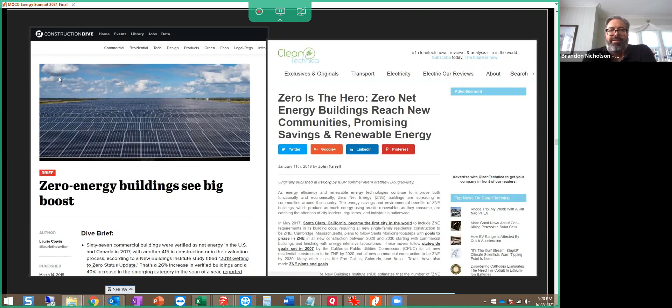As we brought the solar consultant on, we're actually struggling to have enough energy use on site to cover the solar. So there's some debate now about potentially moving some of that energy to other parts.

If you look at the target, 15 EUI is probably the easiest way to translate it to US terms. What's really being attacked is the heating, cooling, and dehumidification loads, and eventually hot water as well. Passivhaus was a little late addressing hot water, but over the last 5 years it's been a focus, since they'd already handled heating, cooling, ventilation, and dehumidification loads, getting them sometimes 80 to 90% below a typical building, and 40, 50, 60, 70% below even Energy Star.

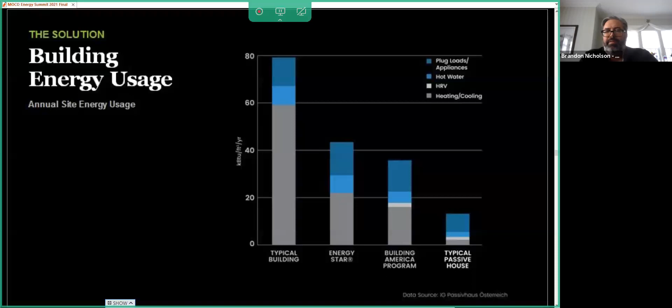Plug loads is always the biggest debate, since none of us can really control what people plug in. As much as we try to educate, that's the realm that I think all of us in green and sustainable building see as the last frontier, or the next frontier.

Probably don't need to cover it for this building, but we do at least go through the high level philosophy, the 30-second pitch of what Passivhaus is.

I still describe it as building a thermos. So you have continuous insulation, you minimize your structure coming through, you air seal it tight. Your goal is to keep as much energy on the inside of the building, or the outside, and not have it bridge.

That said, we all need fresh air. So the passive of Passivhaus comes from the ERV or HRV, the ventilation system. The idea of passive came because it was a passive exchange of energy—not passive solar. It was a way to recoup air or energy in air by pushing air through a mechanism, a series of intertwined metal straws or a ceramic filter, where you capture the energy leaving the building and put it back on the incoming flow.

The final issue is light. We have free light over the course of the year, but way too much in the summer and never enough in the winter. So how, through design, do you achieve that balance?

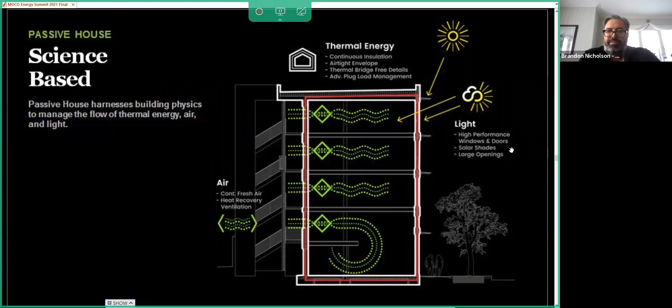We can flip through the next few since I've covered them already. One of the selling points I've put for Passivhaus in the past is that it is simple and verifiable.

LEED I'll give tons of credit for raising green building and best practices, but really, most of the things we do in LEED were practices we should have just adopted anyway. We work our way down the checklist and we're done. One other important thing is the bias towards urban buildings, but just because you build an urban building doesn't mean you should ease up on the balance of best practices.

My other early complaint about LEED was the fact that energy was always the hardest target to achieve, at least with the way that we traditionally build buildings. What I liked about Passivhaus from the get-go is that it is a modeled solution as opposed to a checklist.

You are actually paying attention to how what you design interacts with the environment around it, and then it's verified. You have third-party inspections to make sure you are building appropriately, and then you have an air tightness that is far beyond code. It's that 0.6 ACH, a blower door test run both ways to ensure the envelope is airtight, far beyond what most buildings do or achieve.

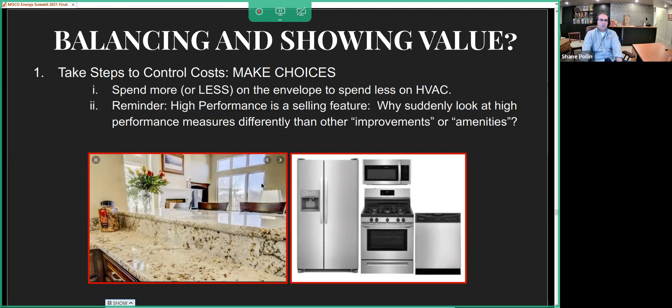And yet it still seems like a lot of folks are reluctant to make that jump. We think we have to start educating, and I think it's already starting to happen with the consumer population—our occupants, our residents—to not only focus on things like granite countertops and stainless steel appliances, but to make choices in how we're building. We can choose to do things like granite and stainless, or we can start placing a value on high performance features, on comfort, or on health.

That is one of the things I think we did successfully at the Duffie companies, and what I hope to continue doing with PS is to bring what we're doing down to the real life of the occupants of the building, and say that air sealing, yes, is good for energy, but it's also good for addressing transmission of noise, which is a top complaint among multifamily dwellers, or odors, another complaint, particularly with the advent of things like legalization of marijuana.

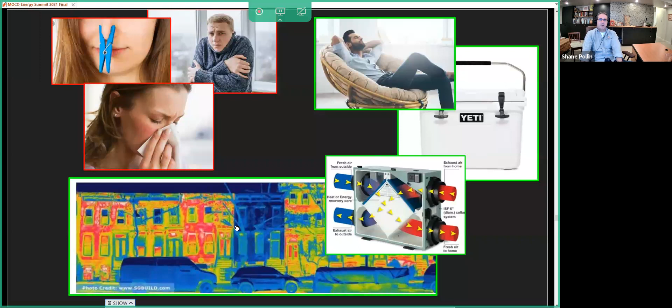I've had friends who have complained that, living in certain places, they just cannot keep the odors out. So some of the things we're doing for high performance, as Brandon mentioned, air sealing is paramount—it really has benefits that cross lots of different areas, including some that are really impactful to folks living in these homes.

And with that, we'll go over the meat and potatoes of how we're trying to achieve what we're trying to achieve. Brandon, you want to run through our overall design approach?

Yeah, so back to what Shane said very early on, iteration and simplification were key to this project from the very beginning. We'll get into each of these in depth, but these represent the divergence from a standard approach—meaning for the basic structure, we went with a panelized steel system that we'll get into.

For HVAC, we have an approach where we look at either individual, neighborhood, or whole building approaches. Where we landed on this project was individual control, a super simple ventilation or conditioning strategy. With ventilation we can pick and choose, and we realized for this project in particular that a neighborhood approach made sense—so while conditioning might be controlled independently into a unit, ventilation and dehumidification could be handled by clustering groups of units onto one unit to get maximum efficiency.

For water heaters, we had a lot of debate about system-wide versus one-to-one, and landed on individual and shared heat pumps. Appliances are really kind of the plug load—what you're putting into the unit—and that's more of a spec decision. By using heat pump dryers, we were able to eliminate ducts and get savings. These are condensing dryers; they're heat pump dryers where the only byproduct is water going down into a condensate drain.

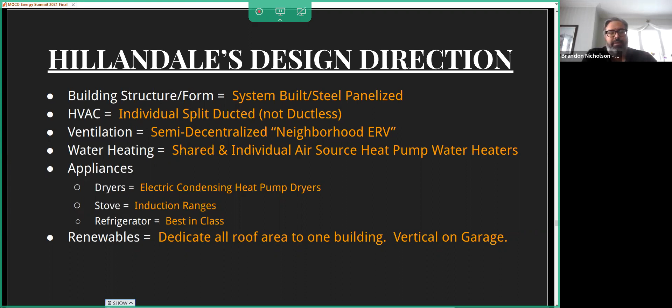But as the project continued, one of the interesting things that happened was we were trying to figure out how to screen the garage to deal with planning review. And it turned out one of the cheapest things we could do was actually clad the garage in solar, cheaper than just about anything else we could do. So we ended up doing the very unintuitive thing of cladding the north face of the garage with solar panels. It faces off to the northwest.

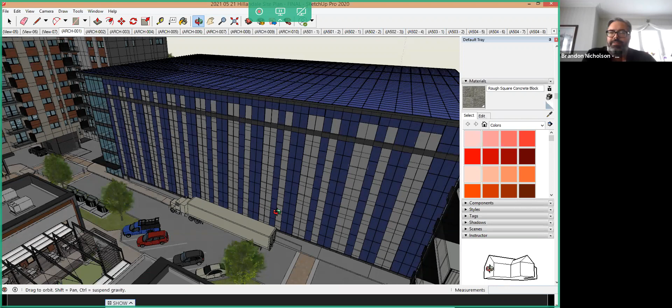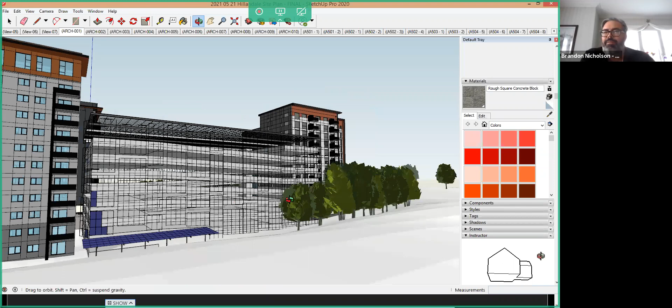At first, we thought about using used solar panels to achieve it. Then we threw it in the NREL calculator, and it turned out we could get 30 to 35% energy production out of it. So once again, with iteration over time, we landed on actually a very functional, practical scheme that when you look at it as an outsider may never make sense. Who puts solar panels on the north side of a vertical garage?

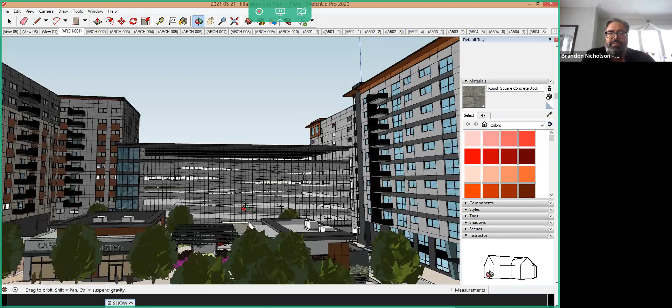But the fact that it could continue to iterate, offer an inexpensive solution, and also tell the story. Anybody who's in the plaza, the retailer, or part of the project, this is going to be the backdrop of that public space, with these kind of solar panel columns that go up and down. And then even the canopy carries beyond.

But as I mentioned, when we started to really engage solar and get down to full calcs, we are even overshooting our initial goals.

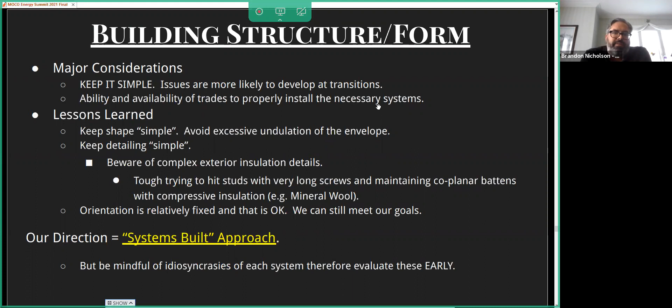Going back in where we landed on structure, keep it simple. I think Shane's approach of moving to something manufactured led us to consider a whole bunch of different things. But where we ended up was precast, or I guess a pre-manufactured structural system called Prescient. This was not in the project to begin with, but it's a 16-story panelized system out of Colorado originally, but now has a North Carolina facility.

But this comes back to durability, speed. This is something which is machined. It is precise to within about 1/16 of an inch. It does have vulnerabilities, but very early on, we paired it with traditional conventional EIFS.

And by that, I do not mean the 1 inch of blue board tacked on the outside of a wood frame building like we do in the US. This is all the insulation being on the outside, done in a similar manner to how they would have done it in Europe. And back to trading value, as Shane talked about earlier, it turns out this was the least expensive way to get the building clad and insulated, coming in far below any other cladding we could have put on price, and taking care of the insulation all at one time.

And I'll point out, Brandon, sorry to interrupt, but you mentioned there are some idiosyncrasies to the building. I'm not sure there are vulnerabilities in it, but the idiosyncrasies of the system, and again, a reason to research them early.

So Prescient works on a 2-foot grid, and Prescient likes rectilinear. They don't like curved walls. They don't like strangely angled walls. There's certain span limitations.

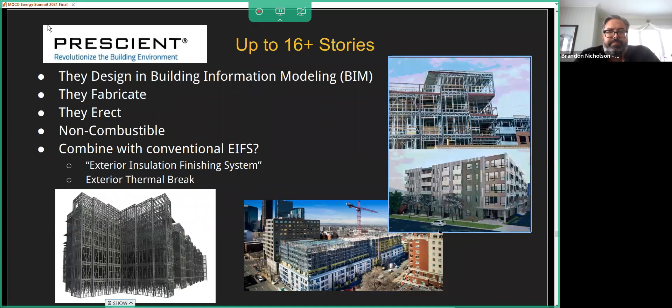So the next element was water heating. The major consideration is that we're trying to build an all-electric building, not bringing in combustibles. That meant electric, and that meant heat pumps both for units and for hot water.

We had to evaluate whether to use a centralized, semi-decentralized, or individual system. We had to consider accessibility for maintenance, and recognize that heat pump hot water heaters are effectively air conditioners, providing supplemental cooling and dehumidification, and how we could take advantage of that or address it.

We had to keep in mind floor area requirements and who would be paying for utilities. We're actually going with a split utility approach. The age-restricted building, which is two-thirds affordable housing with 155 units, has about half of those units sharing water heaters, one heater per two units, and that building has all utilities included. That's partly due to the master meter approach needed to reach zero net energy on a single meter using all of that solar.

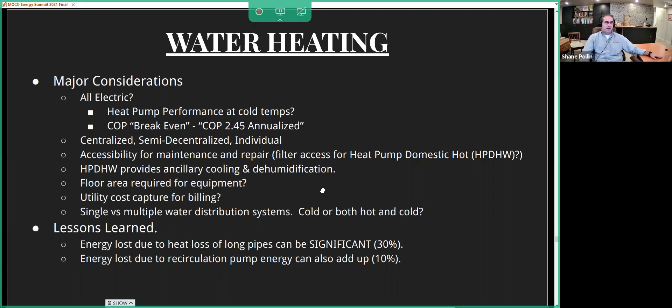So all of these systems required understanding their idiosyncrasies and trying to keep things simple. A single master meter with all utilities and the solar energy going to it was simplest. We don't have virtual net metering in Maryland at this point, so we decided to go with a hot air source heat pump water heater in a semi-decentralized implementation.

Carrying that further, we have cooling and dehumidification needs because we're in DC and Maryland—buildings here tend to have far more cooling need than heating need. So we were able to take the byproduct of the hot water and have that work towards meeting one of our other demands.

We realized we needed to get a bit more energy into the building to offset the air conditioning we're now providing through the heat pump hot water system. So at the end of the corridors, we started tuning up the glass to get more heat in and help offset some of the air conditioning. With good MEP and early modeling, you can really get these systems to play off each other and take what would otherwise be waste to meet the overall performance goals of the project.

Knowing that first generation passive house buildings had a reputation for being a little warmer than comfortable, we have this byproduct of cooling and dehumidification in a building that can tend to overheat. We're not supplying extra heat by running hot water or refrigerant lines that might reject heat but still transmit energy through the building. We're not trying to dump extra heat throughout the building using a more central system. That's one of the benefits of not going to a central system.

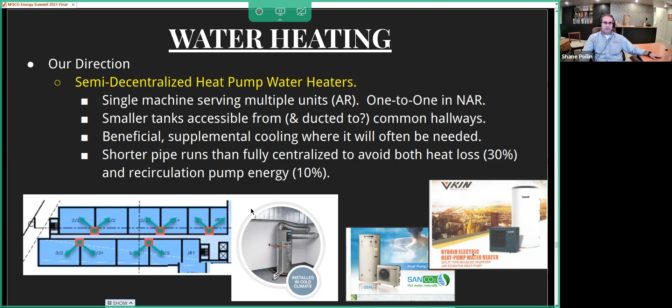I show some of these others, like SanCO2, because I think these separate condenser units, separate from the tanks, are an intriguing direction the market is going. But in our application, our basis of design is a traditional air source heat pump hot water heater, an 80-gallon tank serving when we have 2 units, and smaller tanks when we're on an individual unit.

For HVAC, again, considerations trying to be all electric: we had to decide central versus individual, accessibility for maintenance, how do we get to filters, and utility cost capture for billing. I know some VRF systems have the ability to measure refrigerant and pass that through, but that's not so simple, or is it well implemented often?

So we learned again that passive house structures can tend to overheat. Cooling's important - most systems are oversized for minimal loads, so beware of short cycling. This is still one we're working with Mitsubishi on, to try to keep the system sizes down. That's one reason we hope there's a benefit to a ducted system versus a ductless system, where we have one unit that powers the entire unit rather than putting multiple heads and getting even worse - we don't want to rely on a single point of HVAC for delivery.

A lesson learned - and I heard it loud and clear when I toured a passive house building in Boston and spoke to the owner - mixing, just expecting mixing of cold air when you're supplying cold air, doesn't seem to be that effective. Central systems often come with significant complexity - they're more costly to install.

We had Bozzuto Construction providing pre-construction services, and at one point the question came up: what's the cost of that VRF system relative to a simple ducted one-to-one? It was materially less - something like $15,000, something crazy. They were seeing VRF systems, by the time they implemented them in high-rise buildings, become exorbitantly expensive and difficult to get dialed in.

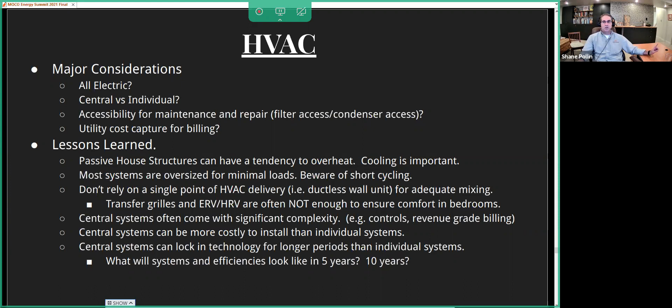Also, with a central system, when you put that big unit up on the roof and carry refrigerant lines down, you're not changing that big central system anytime soon. So as individual air handlers in the units fail, you're tied to the system on the roof and you'll be keeping that same system, as opposed to our approach with an individual ducted heat pump. As these ducted heat pump systems come down in price and up in efficiency, if one fails, we just replace that one system.

We did not place a value on being able to control the individual systems, although I think we will ultimately be able to. We want to monitor heat and humidity from these systems, but not necessarily the complexity of a whole building control system. So we went with this very simplistic, up-in-the-ceiling, ducted system.

The next challenge is where do you put the compressor, because there's also line set lengths. The most cost-effective solution we found was to actually provide a deck on the outside of the building where we could mount the condenser right in front of the unit. But we took it a step further, because these are such low sound units, and this is a fairly noisy site, that we ended up stacking two small condensers on top of each other in a fin that runs up the side of the deck.

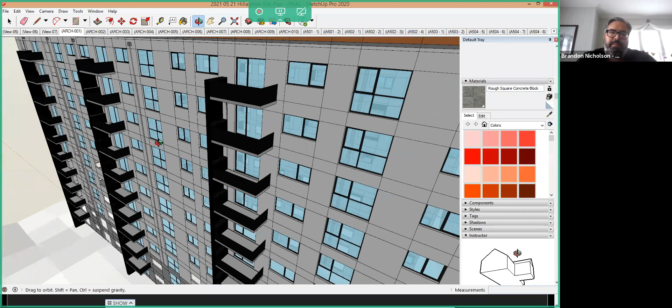The deck itself, we eventually found a pre-manufactured unit out of Washington, where they're building us the receiving cage to be able to stack those two very small condensers on top of each other. Again, that's a great example of why you typically don't see it.

Now, I joke with the team. In Asia, you see a lot of the home shows, you see anywhere for house hunters worldwide, you see either ducted or mostly ductless units up on the walls. But in Asia, I have these great pictures of just walls of condensers on the exterior. The architects assure me I cannot get away with doing that here. Guarantee you will not make it through park and planning with us.

I said we could paint them a color, we could turn it into a feature, we could do something. But the answer was ultimately a balance of hiding them in plain sight, if you will. Of course, they have limited duct lengths, and that's why you don't see a lot of these smaller systems.

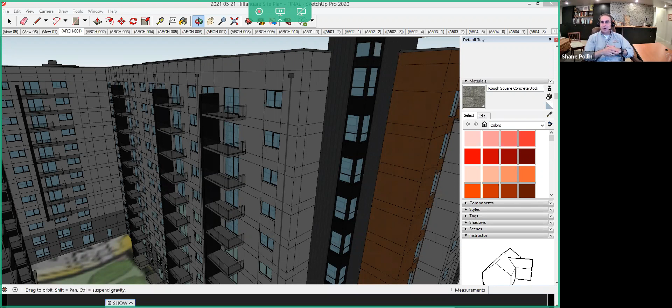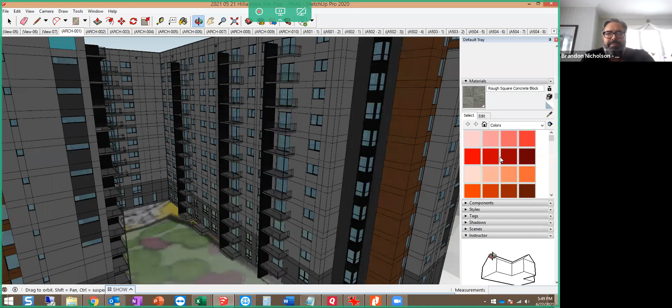It's more condensers, not more air handlers. We have the same number of air handlers we would have had with the VRF system. It's more condensers, but they're very easily accessible right on a balcony, and they're very affordable, and almost anybody can work on them. That's the key here, trying to implement this mechanical solution through an architectural solution. Anytime you need to get at them, you can walk out on the deck, remove a panel, and you have two condensers right in front of you that you can access without scaffolding, without lifts, without a crane. It is incredibly easy to maintain.

Now, that takes care of conditioning. Now, ventilation - same thing. We've done a whole variety of individual unit solutions, neighborhood solutions, where you deal with a cluster of units or a whole building. The whole building approach has a lot of drawbacks when you get to high rises - there's pressure differential issues, fire dampers, and a whole bunch of other stack effect issues come into play. Horizontal, we've actually found, works quite well. If you can gather a floor of units and run ducts down the hall, it's a good, efficient way to do it.

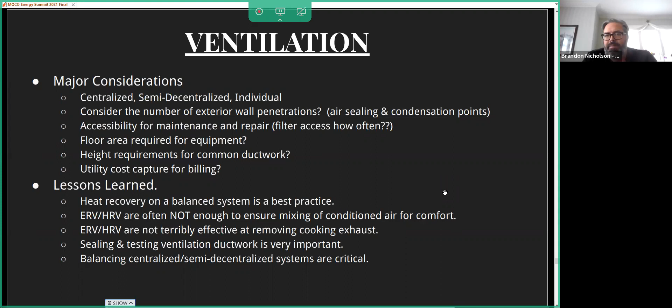Another requirement for the project was kitchen exhaust hoods. So how do you actually deal with makeup air if you have kitchen exhaust ventilation? What we worked through with Swegon is the ability to put a unit down the hall that will serve anywhere between 14 to 20 units. It runs back to a central unit that then reaches to the exterior wall in order to get supply. These pictures are old - we're using a larger system ultimately than these.

We ended up working through with the electrical side, running at higher voltage, which was only for the larger units. So we ended up combining two of our neighborhoods stacked vertically. Back to just the iteration - we have a huge resilience goal for this project, because we have the electrical engineer, resilience, solar, mechanical, and Passivhaus all integrating.

Two years ago, we came up with the one unit per one floor approach, which works great. We came up with a mechanical room that works great. We had line sets worked out, and we were setting off to the races. Then resiliency comes in, and all of a sudden it makes more sense to run the things at 440 or 480 volts. That makes sense to upsize. And then we didn't really want to add dampers.

The team made a last-minute move to do one unit every other floor, creating small vertical neighborhoods. We're not creating a bunch of vertical ducts, complexity, or fire damping, but we're taking almost twice as many units as we had in our first pass.

With the way the team works, we were able to quickly run that through contractor pricing, supplier, mechanical, and electrical cost-benefit analysis. In the end, the way these systems work, we run them down the hall, then have branches that come off to supply and exhaust.

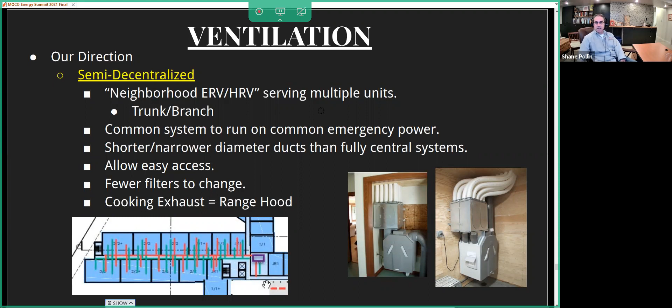To take that a step further, the conditioning and dehumidification module tied to that unit will also be powered as part of that. So if there's a hurricane or a blizzard, you might not have individual control—meaning you might not get the temperature exactly where you want it—but overall you're going to be within the typical comfort constraints of a passive house build, because there's going to be that dehumidification, cooling, or heating depending on the season running through.

Again, resiliency and sustainability—we're putting renewables on, quite a bit of renewable energy on the building. I pulled up the image to show we've got a parking garage that faces south, adjacent to the very heavily trafficked Capital Beltway, the ring highway around Washington, with 200,000+ vehicles pre-COVID, and rapidly returning to that level of traffic if not already there.

What we're doing, in this older image, is basically dedicating all the energy from the site and the garage to the single building. So people hear we're trying to build a 12-story zero net energy building—yes, we know we could typically produce as much energy on one roof for far fewer than 12 levels, but we're not using just our roof. We're using the energy available on the garage's roof, on the vertical face of the garage, and even on the south face of the garage.

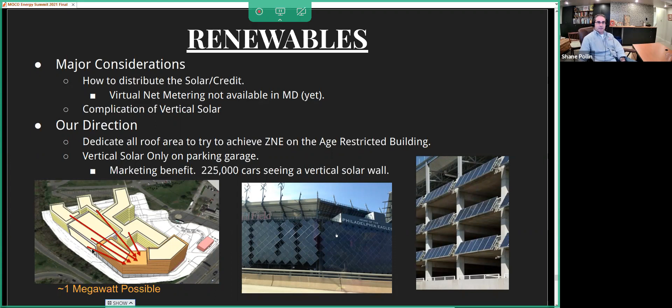Again, we're happy to have the project in Montgomery County in partnership with HOC. Montgomery County has a new Thrive 2050 plan, for those of you familiar working in this area, and we think the project really just fits right in. There's not going to be one silver bullet for what types of buildings need to be in the future—it's going to be several—but clearly projects like Hillandale Gateway are one of the building types that are needed.

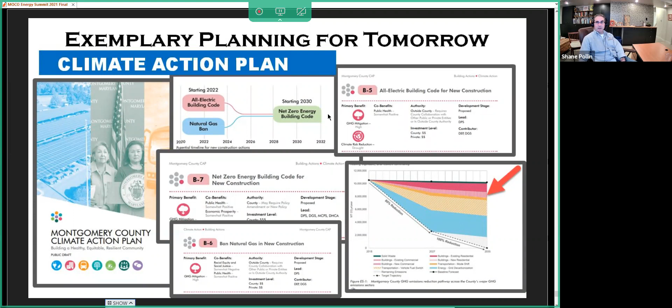Montgomery County also has a climate action plan. Here you see, starting in 2030, zero energy building code—they want to aspire to be zero net energy by 2030. Here you can see we're a decade ahead. We're trying to build zero net energy and demonstrate how it can be done, at as close to parity as we can, from the beginning here in 2021, starting construction in '22, not in the 2030s. We're really proud to be working on the project together with HOC. I'm thrilled to be able to work with Brandon, and I've learned so much from him in this process. And that is Hillandale Gateway.

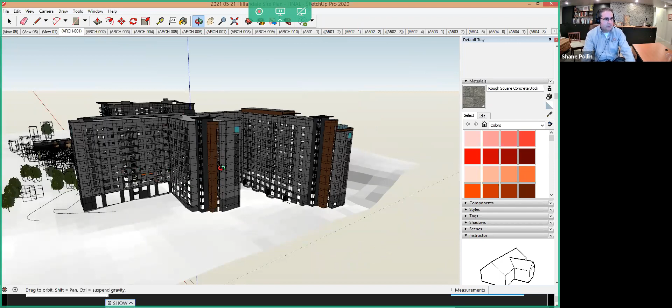I can pull open the model. If anyone has any questions, we can do it in the context of this model. But again, it's a two-building program. There's the age-restricted building, 155 units. There's the non-age restricted building, 308 units, with a couple retail pads in the front, connected by a garage. The buildings are actually offset one level—the NAR is half a level below the AR building.

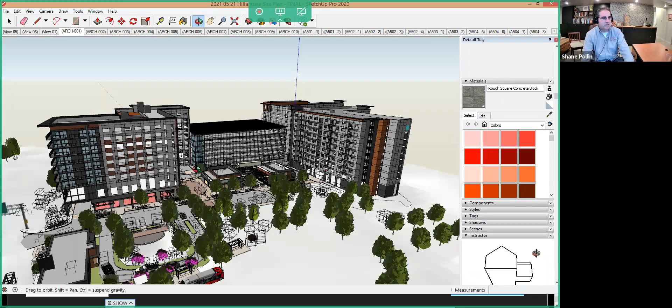This is the north face. The south face faces the Capital Beltway. Here you see we even have a solar canopy on top of a play area on the ground, because the volumes of traffic were relatively high, so we just put a shield up. The site is very tight, and we wanted to really utilize any space that we had.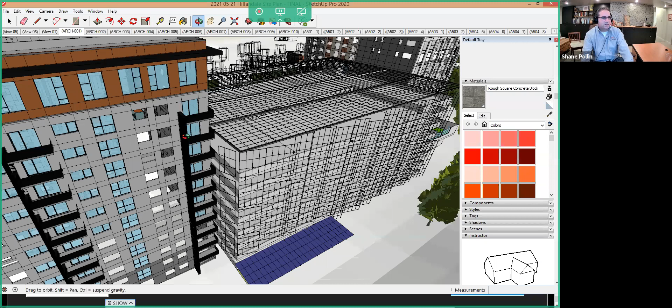Here you can see those fins that are hiding the condensers. There are 2 condensers here serving the end unit and the unit adjacent. If we zoom in, you can kind of see those Passivhaus-style tilt-turn windows with 1 operable pane, and the rooftop amenity space.

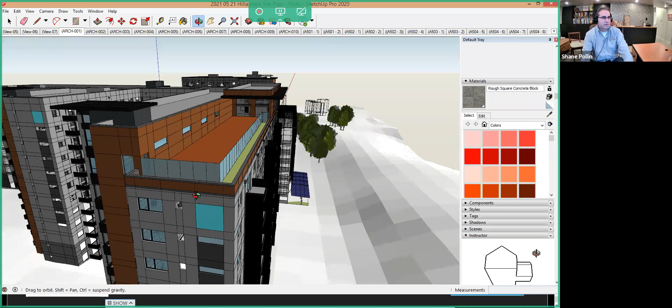Sound attenuation and noise attenuation were a requirement through the planning process. So we came up with this strategy of the parapet wall with the glass behind it, partly again for maintenance—we try to think things through. If we put the glass out on the edge, how are we going to maintain it? So we put a doorway through, we can come in, clean the glass, and try to basically keep our building in good condition for many years.

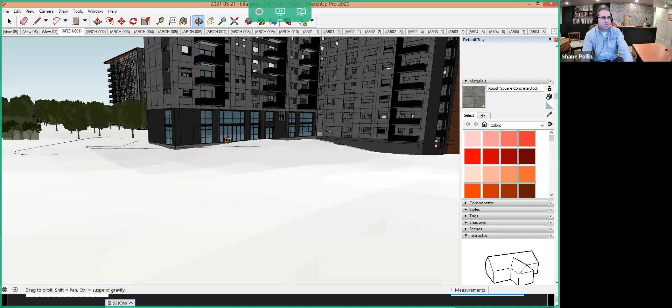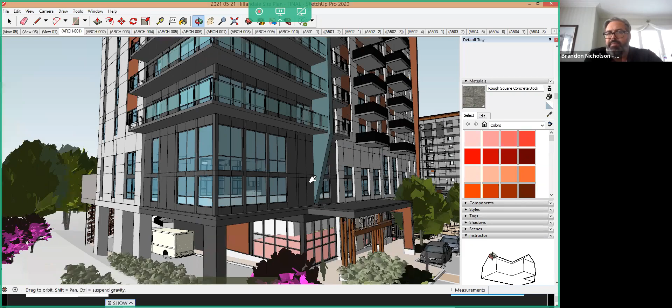We really tried to think through function of the site and loading and unloading, so there's integral loading.

While you're talking through this, if folks want to type in questions, that's great. There's 19 of us—you could unmute and we could have a conversation too. Yeah, but we have a question out there.

The pool just brought up a whole lot of questions for me, but I'll come back to that if we have time. Did designing to prescient modules and rules make it harder for other subs to compete on price during bidding? How much extra time did it take to go through the process of learning the prescient system well enough to design with it in mind?

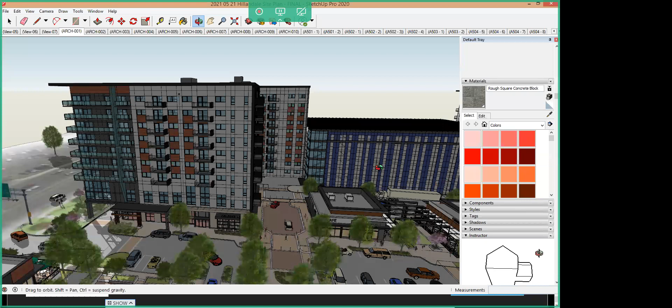Yeah, so the prescient system was designed before it really even got to that subcontractor pricing. It's basic—it's a light gauge steel frame, so there's a metal post. It's the same in terms of running wire, running plumbing. It's the same as any commercial cold-rolled metal stud system.

So we don't think there's going to be any pushback necessarily on that type of system once we get it out there. We didn't hear any negativity through Bozzuto while they put it out for preliminary pricing to different folks.

In fact, I think what it does is we can avoid conflicts, so we could pull up, like, they model every stud, right? We can see where everything is and help provide clear guidance, and we worked out some of those things earlier. It definitely takes more time to program to the rules, and I think it takes as much time as you're willing to give it to design to the best of your ability.

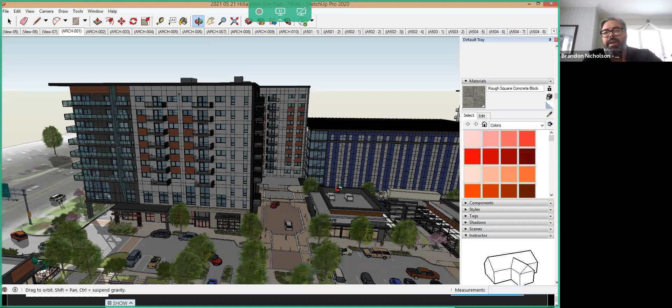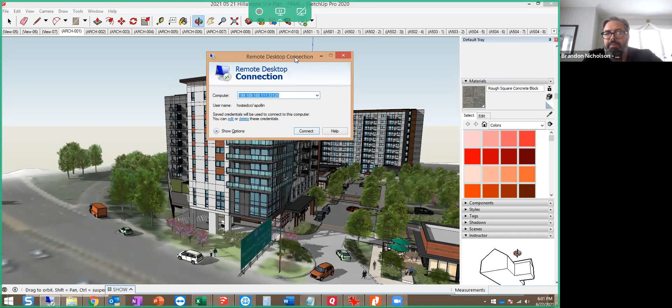I don't know how, as a percent or hours, Brandon, maybe you could say how much. Well, I think what really made this project work from a design side was the fact that we knew fairly early on in the entitlement process that we were heading towards prescient to get height. Once we knew that, you've seen a couple earlier versions of the projects that used to have more angles, were a little bit more low rise, a little bit more spread out. There was an epiphany in the middle of entitlement that what we wanted to do was to actually go vertical.

And actually, one thing Shane didn't cover was that retail pad is actually preserved as a potential hotel or office building in the future. There's an ability that you could remove those two retails and put another 7 or 8 story building in the middle of the site if it ever became economically viable.

The other thing is we realized prescient prices closer to wood than it does to type 1 concrete. So we went to maximizing prescient everywhere we could, trying to get it up to 12 stories, bearing slab on grade wherever possible, and then only doing raised podium decks over amenity or retail space. So once we understood those rules, we actually reconfigured the site in entitlement to be able to do it.

But we always knew we could come back and do a type 1 building. We always knew that we could come back and alter to another light gauge manufacturer. Their price has gone up, but it is. So is wood. Yeah, so is wood. It's continuing to make sense.

Yeah, and so that's a key point, though, is that we chose a proprietary system, and we said early on, we can build a building designed to the prescient rules in anything. We could build that plate in wood, we could build it in concrete, we could build it in metal, we could build it anything. But you cannot build a building designed for anything in prescient. And so we didn't remain beholden to prescient, if you will, as a proprietary system when we made the decision to design to those rules. We just knew that we were building to optimize to that.

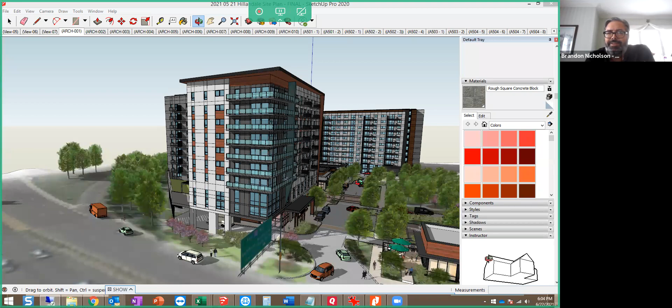You know, I'm looking at that, the NAR you can see in the distance here. You can see the two decks facing front, and there's a panel that's just slightly wider in between those two decks. You barely even notice it, but you can see the corner panel, that mid panel between the two decks, and then that panel in between the next two decks. It's very, very subtle. You wouldn't know that it was there, but knowing that they had the rule that they needed essentially an L in the exterior facade about every third unit, great.

We have an L in the facade every third unit, and that affects our retail glazing and the glazing above. I don't even know if Shane knows we went through that coordination, because it was one of those rules we learned early on—we can follow that as long as we know it's there. Because of that, we've had very little modification as we've continued to develop.

I will say the danger with Prescient is they're so fast, and on top of it, they have a crew of engineers and CAD designers in Poland. So we are always behind them. Any change we do takes 24 to 48 hours to get integrated into Revit—they're on it overnight and have it back to you by the next day. So I'd say they actually have a very strong engineering team.

They have a very good production team. The only caveat I'd put is they do have some communication issues between bidding and design, but that's minor—something you can get past. I've actually found them very pleasurable to work with.

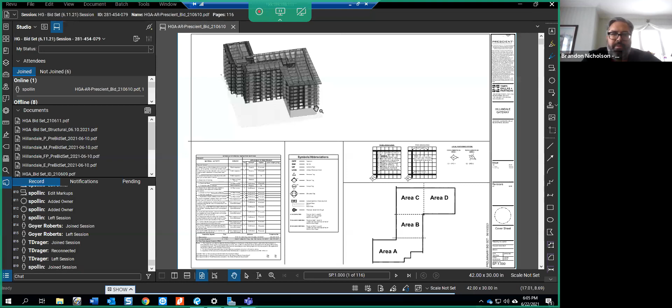Now, Shane brought it up—I'd bring up the Revit model, except what I originally realized is part of the reason it takes so long to process is you really do have to peel back what you show, because they model everything down to the bolt, say, in an expansion joint, in the full model. Every stud, every I-beam, everything is there. They also do run clash detection.

So one of the things is we were just doing a bunch of land use coordination. We had a call today—Torti Gallas, who's actually been a great partner we work with in the DC area, had some intern move 24 windows, which now affects their windows. They can tell us, you need to go look at these stacks, we think we have a conflict. They're very, very thorough at what they do.

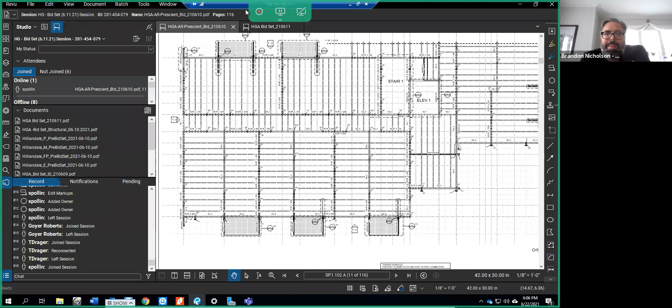It's a great question in the chat from George about how the balconies are structured. You said balconies, and I was thinking passive house penetrations. Yes, there is a passive house penetration.

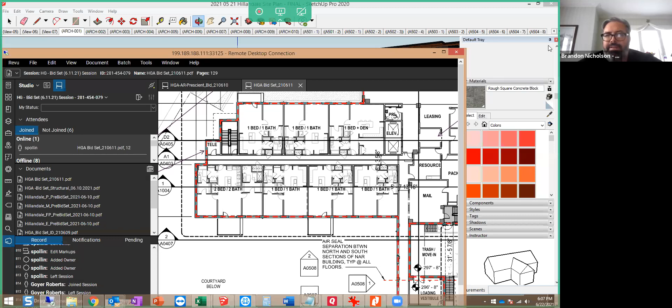So there is a bit of kind of armatherm or high density generic plastic in between. We worked it through with them early—their details have changed, and then we morphed with their change. But we have two outriggers that are going to be provided by Prescient that hold up their standard deck, which sticks about 6 feet off the face of the building. Onto that is going to be put an aluminum pre-manufactured deck with a rail system. And then onto that is actually where the condensers go, and then that goes back into the wall.

So the picture is Prescient's going to go up first. The outriggers and the extensions are going to go on that first pass. Sto, or EIFS, is going to come in and apply the EIFS skin to the whole building. There'll be sleeves to receive the line, and there'll be two outriggers ready to receive the deck. The deck will go right down on the outriggers, really conceal the outriggers. And then the rail goes up.

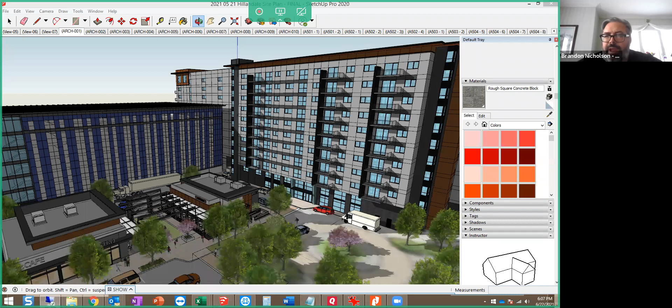So it is a very repetitive system. My joke is the only deck that doesn't comply with that is we use the prescient standard deck on the corner of the AR building where we wanted a continuous deck. So there we do have a series of outriggers and a series of thermal breaks.

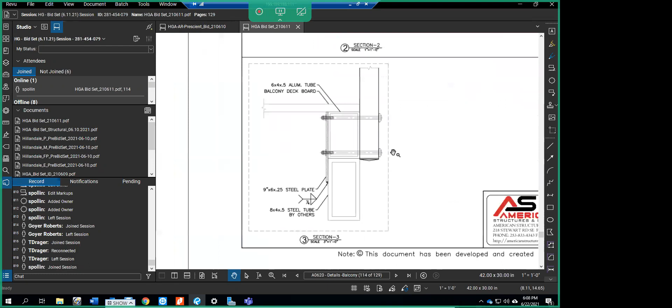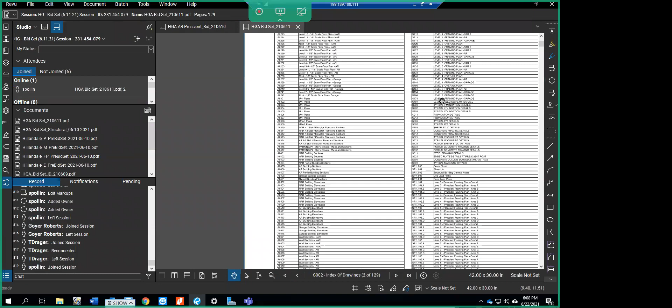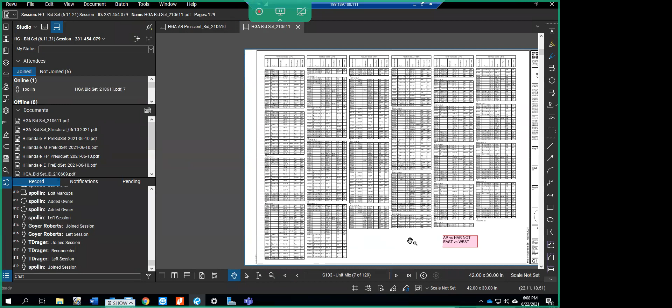Alright, so I'm going to ask a question about the pool, and then if nobody else has questions, we're going to call it a day. So pool in a passive house—for energy code, you'd be doing energy recovery on the water heating side of the pool, so air leaving the pool would have to heat the water of the pool. How do you actually balance that if you've got that strong of an envelope? So step back—the biggest problem with pools is two things: evaporation and contact with the ground, right?

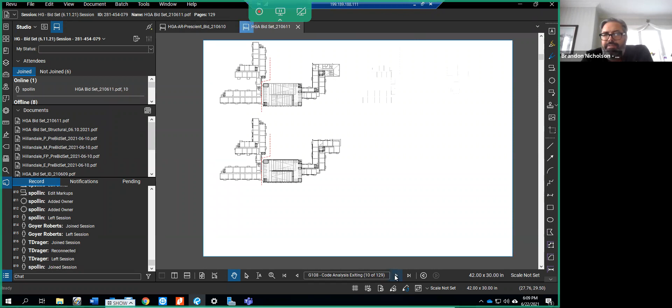The way Passive House approaches a pool is you treat it like a thermos, like anything else, and it has a different set temperature point. So the pool area is air sealed, modeled separately. We've actually modeled it both in PHPP and WUFI Passive. There's an insulated crawl space, for a better word, vault around the pool, so there's an equivalent envelope below the pool and through the pool. There should be a line on those drawings.

You probably don't have the set with that in it, but there's a line where the pool mechanical is in on the pool envelope side. That stair is actually generally conditioned, and then it comes down by the changing rooms. So that whole pool area is essentially a separate air volume from the rest of the building, air sealed and mechanically isolated from the rest of the building.

The pool water itself, the goal is to bring it up to temperature, but then you're not going to have those ground contact losses. The air is actually set to 85 degrees, the same as the pool water temperature, and that does help reduce evaporation and moisture losses. There's a dedicated ERV that runs that pool space, and the pool water, this is not natural gas, so it's electrically heated. The big expense is bringing it up to temperature the first time.

And then the pipes and everything are within that same temperature space and are going to be run at that same temperature. So picture it like, instead of doing an in-ground pool where you've got 57-degree earth contacting your 85-degree pool water that's perpetually leaching your energy away, you've got an insulated envelope and an air-sealed envelope all the way around, and it's just run at a different set point. Does that answer your question?

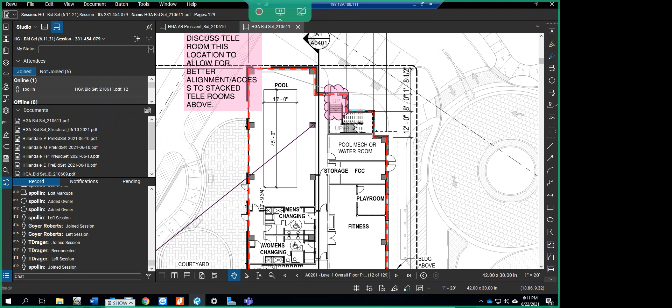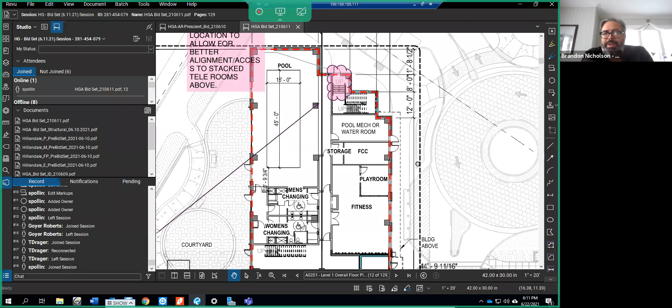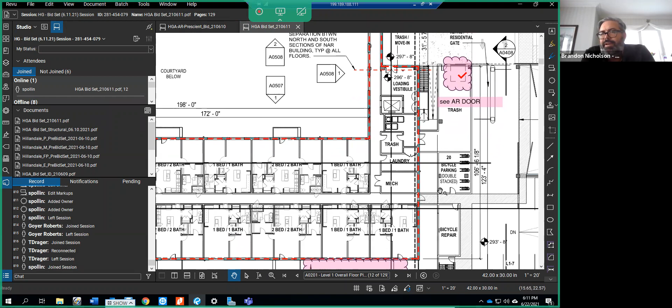To Shane's question, this is why over the last decade I've spent so much time focusing on my direct relationships with architecture firms and passive house specialists in Belgium and Germany, particularly in Brussels, where there are two firms we've developed a pretty good relationship with, and have actually hosted over here. This is Sabine, she was the one who taught me this. She's with Architect Associates in Brussels. They did a retrofit community center, and she walked me through, actually before this project, for another project we were working on, consulting on how to do a pool in a community center. This stuff is not new, there are people who've done it, you just got to find them. Unfortunately, most often they're not in the United States.

Once we got the philosophy, we realized it's no different than anything else. We're really just changing the modeling parameters, which the model's set to do anyway. You can crack the model open and change your ranges anytime. It's designed to do that, and the physics does not change.

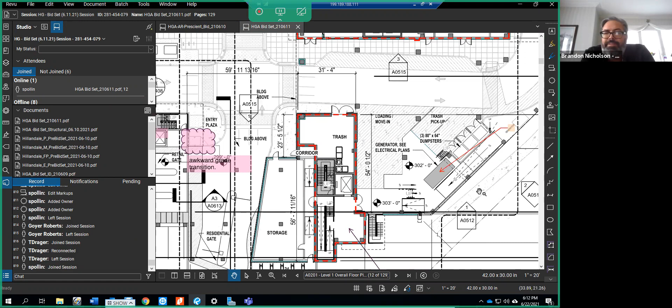First of all, that pool thing is so interesting to me because my parents have a pool and it will be hot on some days, but the pool will still be so cold. So I just found that really interesting. Is that, and this is my question, does that work for outside pools too, that whole thing? Because is this an indoor pool? It's an indoor pool.

When we started on this project, it was an outdoor pool. I think I challenged Shane and Torty that if you put it outside, one, it's a huge energy loss or energy consumer, but you also might only get the benefit of it 10 or 12 weeks out of the year. And if it is in the envelope and stays at temperature, you've now created something that's actually going to probably use less energy over the course of the year, and it's a year-round benefit.

If the question is, does an outdoor pool suffer from the same heat loss associated with a 55-degree ground temperature, the answer would be yes. It would, and therefore insulating the pool, if you tend to heat your pool, would also provide benefits for the same reason, that heat's going to go from high to low. If you have a 70 or 80-degree pool and the walls of the pool are always at 50-something degrees, you're always losing heat.

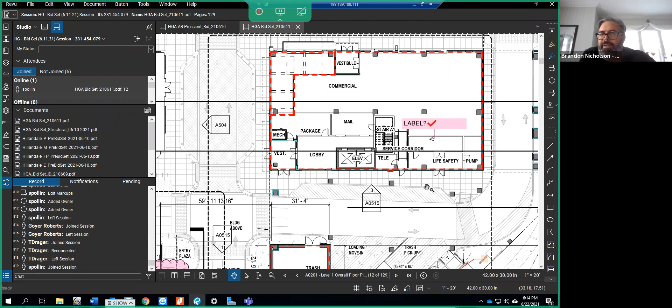I have one more question. I'm not sure if I walked away and missed this, but this whole idea of passive houses—is this new to the area, or are there other passive houses in the DMV area, or is this completely new?

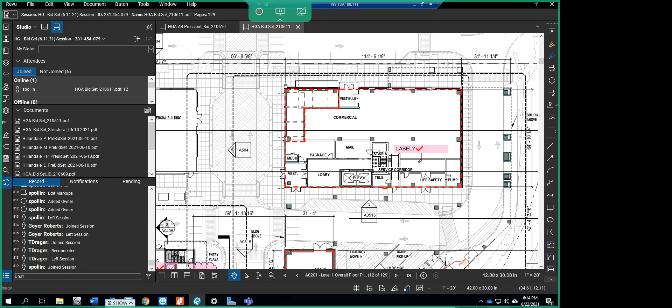Passive House itself is not new. There are buildings built to these standards using these principles in other parts of the country, but in the Washington metropolitan area, there's, I think, one larger scale project—it was a retrofit, Weinberg Commons. I don't know of any others, and even that's not at this scale.

New York has been a front runner in adopting passive house principles and standards. There are some buildings in the Pacific Northwest where Brandon was working. There are buildings built to passive house standard in Pennsylvania because there were incentives provided through affordable housing, where ironically those initial developers went after the points to win awards without maybe fully understanding what was involved. But we've learned from those buildings too, and spoke to some of the professionals on those.

So the answer is, in our Washington metropolitan area, there's nothing like this. We hope there will be more coming. We think that passive house, the same way we looked at LEED coming—whether it's the adoption of PHIUS, Passive House North America, or other standards, PHI, I don't know—but these principles for how we build buildings, air sealing, paying attention, that is coming in code. So we can either figure out how we're going to do this stuff now, or it will be required of us in the future, the same way we looked at LEED.